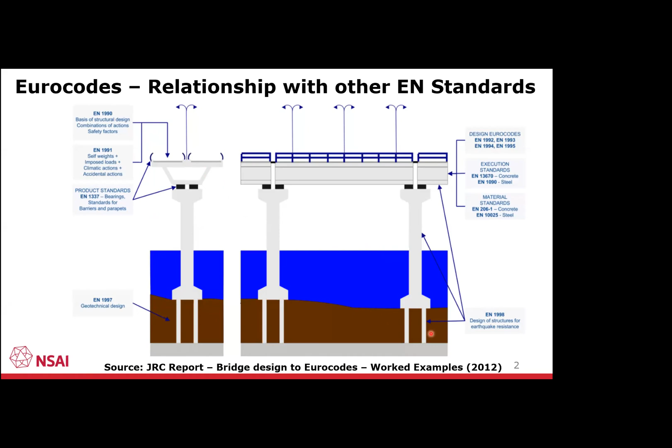So firstly, we have the basis of design, which is EN 1990, which is used in conjunction with EN 1991, Eurocode 1, actions on structures, but also geotechnical design, Eurocode 7, and Eurocode 8 on seismic or earthquake design and resistance. Now, these are used to ensure that the structure's reliability and robustness are suitable for a given design life of a structure. And for bridges in Ireland anyway, that is approximately 120 years.

Now, there's also the material detailing and design Eurocodes, of which 4 have specific bridge parts. That's Eurocode 2 for concrete, Eurocode 3 for steel, Eurocode 4 for composite materials, and Eurocode 5 for timber. We also have Eurocode 6 for masonry structures and Eurocode 9 for aluminium.

And then the second generation codes, we will have 2 new Eurocode parts, or Eurocodes in their own right actually, on structural glass and tensile membrane structures as well. We'll talk a bit more about that later on.

But with all of these Eurocodes, as I said, they are used together, but also in conjunction with other construction product standards and construction standards in general, such as execution standards like EN 1090 Part 1 and 2 for steel welding, which you might be aware of. Also for material specifications like EN 206 for concrete, as well as other construction products and harmonized standards.

And at this point, I'd like to point out that I suppose the Eurocodes aren't just design standards in their own right. They do support the European internal market by removing barriers to trade, particularly in the area of engineering services. And they support the Construction Products Regulation and the Public Procurement Directive as well.

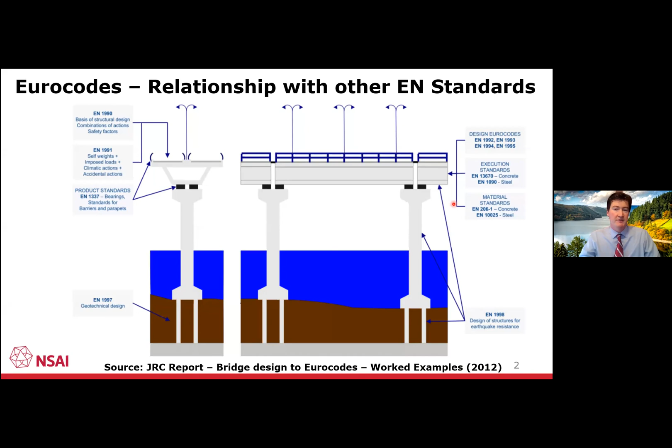So to understand how all this came about, we should really look at the history of the Eurocodes. They were first envisaged by the Commission back in 1975 to support the Treaty of Rome. Then in 1984, the Commission themselves actually issued a set of Eurocodes. Then with the Construction Products Directive, which came into force in 1989, responsibility for the Eurocodes was handed over to CEN, the European Standardization Organization. And over the next 20 years or so, they were developed further. And in 2010, we adopted them fully here in Ireland ourselves.

So moving on then to some more present day. About 5-6 years ago, work started on the development of what's known as the second generation Eurocodes, and I suppose the purpose of this event. And now, this year, we are looking at the launch of very technically stable drafts and documents which are being issued for public comment and consultation across Europe. And again, I'll talk a bit more about that later on.

But finally, just to state that while the date in Ireland for the adoption of the second generation Eurocodes still hasn't been formally determined, it does have to be done very soon. And the decision will be made in conjunction with all relevant stakeholders, and this would include government agencies and departments and construction sector representatives.

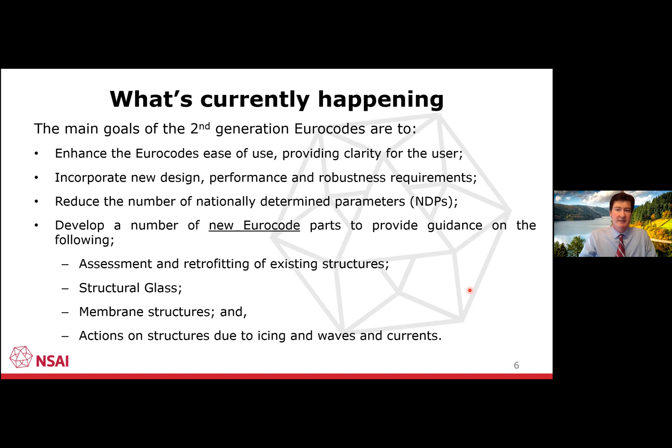The project will see 74 Eurocode documents being published. The vast majority of these will be EN standards, and a number of technical specifications as well. Of those 74 documents, it's estimated that 55 parts will require Irish national annexes. This has yet to be finalized, but it will exclude Eurocode 8 for seismic design for, I would guess, obvious enough reasons. There are 9 brand new Eurocode parts going to be published, and we've already touched on some of those.

And 3 of the Eurocodes are undergoing major restructure, in particular EN 1990, which is going to give more prominence to geotechnical design, but also give additional guidance on structures other than buildings and bridges. Eurocode 2 for concrete is looking at introducing new performance-based criteria known as exposure resistance classes for durability and depth of cover. And Eurocode 5 for timber is looking at introducing additional guidance on cross-laminated timber, CLT, particularly for use in high-rise buildings made from timber.

So Jim is going to go into more detail on the technical changes to expect later. But in any respect, this is a significant body of work that's going to have a big impact at national level, as a full revision of our national annexes and the NCCI documents we have is going to be needed. Now, while the NSAI is responsible for the publication of our national documents like the national annexes, it's a group of practitioners like yourselves that are critical to this revision. And the group, as has been mentioned, is involved in the National Technical Committee TC15.

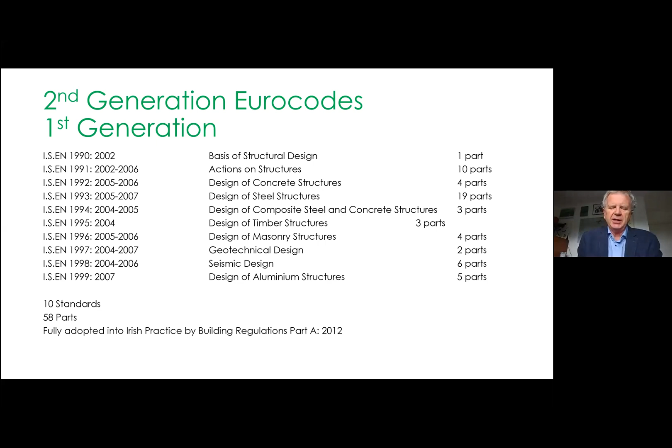They were all generally adopted into Irish practice by the building regulations, Part A in 2012, and other bodies such as TII, or the NRA as it was at the time, brought them into play at that stage. So these are now the documents which we are using here in Ireland, and most people will be familiar with these first generation Eurocodes. But as you can see, the first of these documents are nearly 20 years old. So it's a slow process changing them, and the process is ongoing, and we're now moving on into the second generation.

So there are links between the Eurocodes, and Eurocode EN 1990 was called Basis of Design. As I explain later, the title is even changing. It was followed by EN 1991, which was a material independent code on actions on structures, and that was divided into a number of parts, and I'll mention some of them later in this talk. There were 6 material codes dealing with design and detailing: 1992 concrete, 1993 steel, 1994 composite steel and concrete, 1995 timber, 1996 masonry, and 1999 aluminium, followed by 2 additional material independent codes, which were 1997 geotechnical design and 1998 seismic design.

All parts of the codes are going to be updated with new layouts, new clauses, new content, and each of them will require a revised national annex in time to be prepared, setting out what the Irish approach to the NDPs, etc. is. Now, I've highlighted in red a couple of new parts, and I'll be mentioning these in a little bit more detail later. EN 1990 is going to have a second part, 1990 Part 2, which is assessment of existing structures, assessing not only buildings but bridges and so on. So it will be a very important document and needs to be looked at.

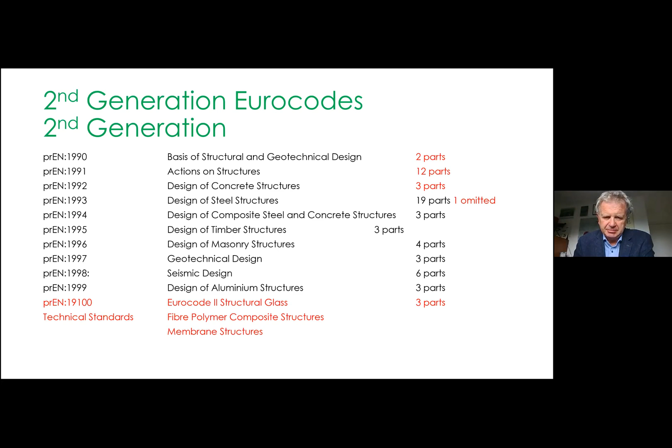But as I say, every document will be substantially changed from what has been there before. The documents are all new documents and will need to be treated completely so. So EN 1990, the title of this, as I said earlier, has changed. It had been the basis of design, but it has now become the basis of structural and geotechnical design. It has incorporated an awful lot of geotechnical information across from EN 1997. So this is important for us all. It has made quite a change to this document, which has become more complex and needs to be considered very carefully from the point of view of every country, including Ireland.

There will be annexes for different types of structures. In the current version, there was an annex for buildings and there was some information for bridges, but this is going to be added with further information in 4 more annexes: towers and masts, silos and tanks, cranes, and waves and currents. And these will be the basis of design for those, and we'll have a lot of technical information in relation to how load factors are combined and other issues. There will be 2 new annexes. One will be a basis of design for bearings, and the second one will be vibrations and footbridges.

And finally, there will be another part, which was EN 1990 Part 2, which will be assessment and retrofitting of existing structures. So again, you can see there that the development of EN 1990 has a very substantial amount of information, and some of it will be quite technical for people designing structures such as coastal structures under the waves and currents bit, and some of it will be fairly general for those of us designing buildings and so on.

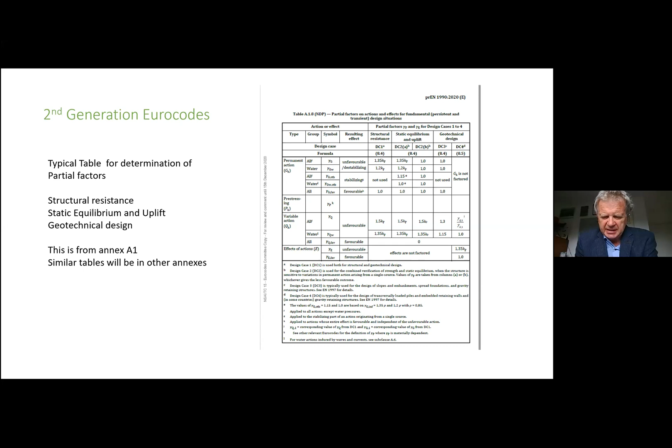One area where the Eurocode is spending quite a lot of effort is in bringing in the robustness rules. A technical report has been prepared, providing the basis of modification of the existing rules. Some of them are in EN 1990, the basis of structural and geotechnical design now, and some in EN 1991, particularly Part 1-7, accidental actions. But new and modified clauses have been prepared for insertion into the material Eurocodes, and Professor Alan O'Connor of Trinity is the convener of this group, and he's been involved very much in the development of these clauses.

There are horizontal groups Europe-wide for fire and for bridges. Ken did mention an Irish horizontal group for bridges, but the structure of the codes is such that the general part is Part 1-1, the fire part is Part 1-2, and the bridge part is Part 2 of each code. And then if there are actions across them, these will be carried across and dealt with within these horizontal groups.

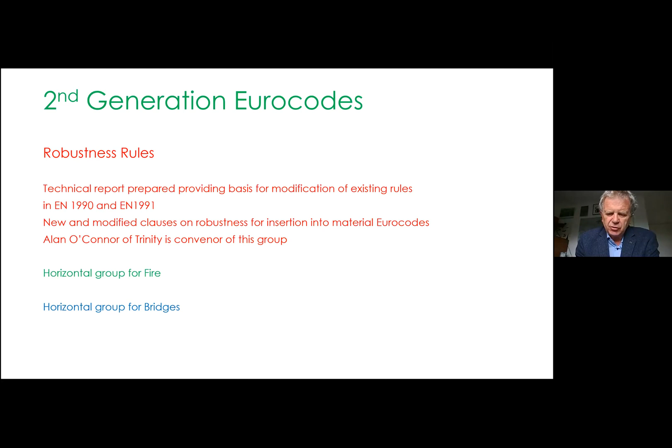There's a potential EN 1990 Part 2, the assessment and retrofitting of existing structures. And a current version of this has been published by NSAI, which is SR CEN technical specification 17440/2020. And the scope of that is additional or amended provisions to EN 1990, how to assess existing structures, the modification of retained parts of existing structures, the assessment of structures, whether it's based on calculations or based on past

performance of the structure. So there's a lot of information in that, and that is a document which will have to be looked at in detail from an Irish point of view, both in respect of changes to bridges and changes to buildings and indeed all other structures. So within that, this is a table from that, just for an example.

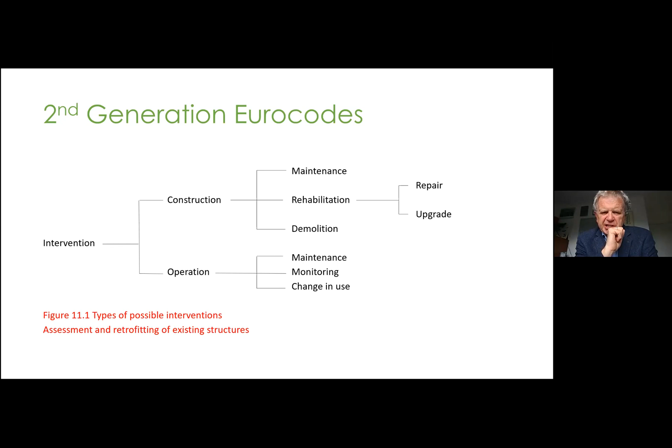It talks about the intervention into an existing structure, and the intervention can either be a construction element or it can be an operational element. Construction can be maintenance, rehabilitation, or demolition. Operation is maintenance, monitoring, change of use. So there's a lot of issues which would have to be looked at, and this gives an importance to the role of us as structural engineers in the development of buildings and of our existing building and structural stock going forward.

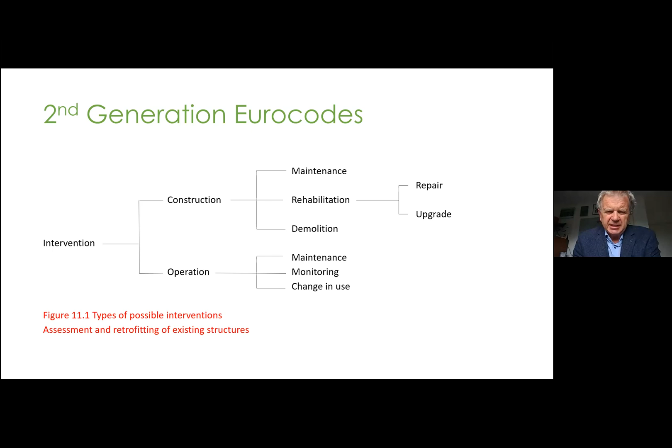The second generation Eurocodes, EN 1991, the various parts that are in that at the moment. There are 10 parts at the moment. There are going to be 12 parts. The existing parts are being modified to some extent. There's no huge variation or extension to the scope, though, as I said earlier, accidental actions and robustness is one that will have a fair amount of development in it in due course. There are changes in these that have to be brought into account, and new national annexes will be required for each of these parts.

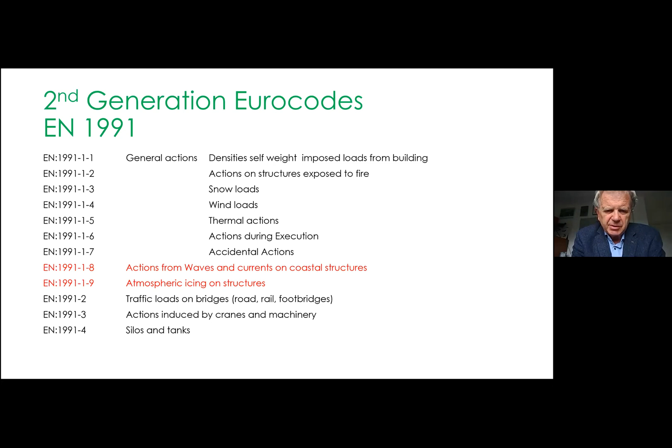The two new parts are actions from waves and currents on coastal structures and atmospheric icing on structures. There's a detailed part, as bridge engineers will be familiar with, which deals with bridges, and these are subdivided into road bridges, rail bridges, and footbridges, and sections on cranes and machinery and silos and tanks.

This new generation, the Part 8 on waves and currents, is a very detailed document, about 228 pages, and it deals with hydrodynamic conditions. It looks at different types of structures, breakwaters, embankments. They're generally coastal structures and how they're affected. And a basis of design has to be developed for that, which will go into EN 1990, and that work is ongoing at the moment.

The other new part is 1991 Part 1-9, atmospheric icing. It's a smaller document. It looks at the ice loading on structures, and generally, I suppose, in the Irish context, the main reference is things on cables for the ESB and so on. The ESBI have produced a map which is available and which will probably be used within our national annex when that comes. But again, it's looking at what is the effect of ice loading itself on a structure.

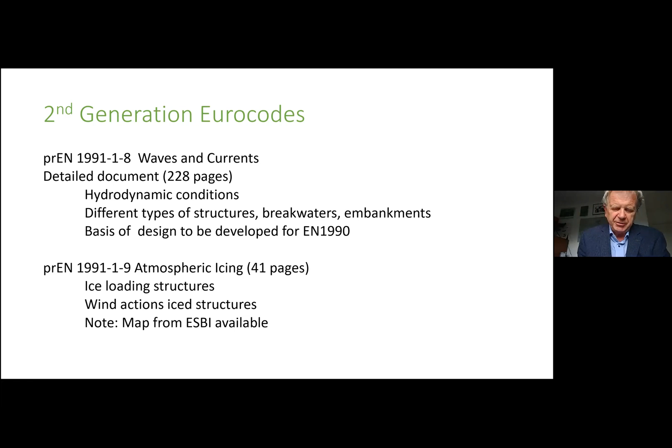So if ice accretes onto a cable or onto a mast, what happens to it, and also then the wind action on an iced structure, because the area of the structure may increase from a small diameter cable to a much larger piece of ice with a much more substantial loading. So there are important issues to be dealt with there. Possibly not the most urgent from the point of view of normal Irish designers, but something that has to be looked at.

And just very briefly touch on some of the other Eurocodes. I'm not going to go into any detail because there just isn't the time. Design of concrete structures, Part 1. Now, Ken has already mentioned that there will be a new section on durability of concrete. And this will have to be reviewed not only by our committee on the Eurocodes, but in conjunction with the Concrete Consultative Committee, who deal with EN 206 Part 1. So this is very important, as you know, the exposure classes, the exposure resistant classes will have to come in.

Another topic which has come in here is that it is likely that bridges and liquid retaining structures will be put in this part. There were 2 parts of the Eurocodes dealing with those beforehand, but I think it's felt better that these would be brought in and the clauses would be in there. But there's a lot of other new rules coming in, different reinforcement strengths of concrete, using stainless steel reinforcement, various rules for punching shear, lap lengths, etc. So there's a lot of information that will need to be looked at in detail with the group looking at those.

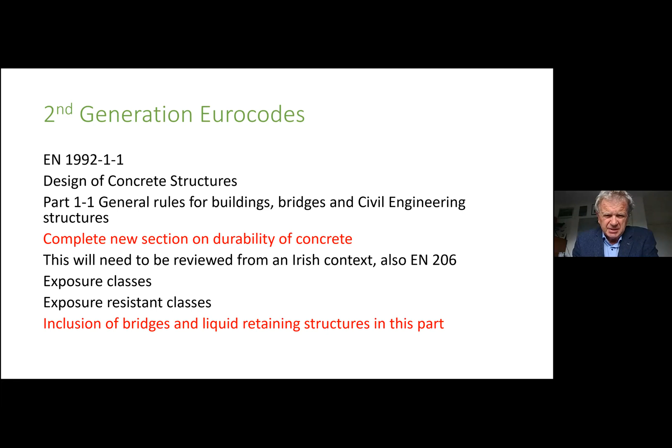I'm not going through most of the others, but steel, there's changes with different classes of steel. Timber, as Ken mentioned, they've brought in cross-laminated timber and different types of analysis. Masonry, new rules have been brought in.

Then in Eurocode 7, there's been a restructuring of that document, and some of the information has gone into EN 1990, and specific requirements. There's a new part, part 3, geotechnical structures. There's more information in there, so that again needs more detailed looking at.

I've mentioned here glass structures. So there are 3 technical standards. One is the basis of design. One is the design of out-of-plane loaded glass components, and the third is the design of in-plane loaded glass components. These are now developed and published. Work has also taken place in the production of technical standards on fiber polymer composite structures and membrane structures.

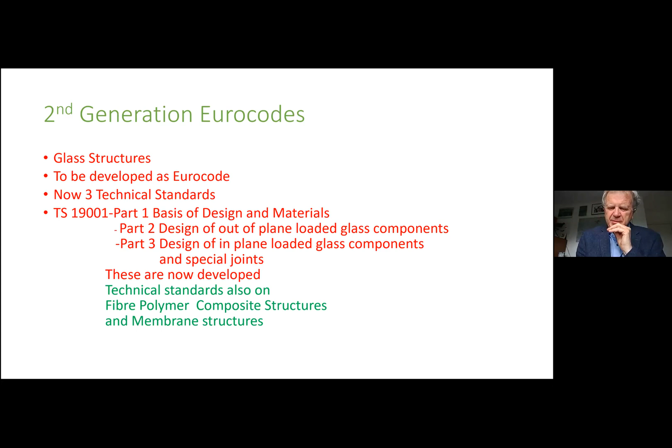So the issues which are arising, there's the program of this, there's development of this. As Ken said, this is in hand since last year with the production of various parts, and this will go on for a couple of years. And there's a huge amount of work. I think here in Ireland, we need to determine the priorities that we're looking at. What are the critical issues that we need to look at? So the work of our committee is partly a prioritization of parts of the Eurocode, but we do have to look at all the parts.

There are climate issues to be looked at. A number of the codes, wind, snow, thermal actions, and atmospheric icing deal with climate issues. We are liaising with Met Éireann and the Department of Environment in relation to that, and a group has been set up looking at those issues, but also looking at other issues, some to do with rainfall, some to do with temperature, and so on. So our group is moving into that area, and as Ken said, we do need assistance. There's a lot of work to be done, and we need people to do so.

So the current structure, Ken has gone through this. We've the National Eurocodes Consultative Committee here in Ireland. We've mirror groups for most parts. Part of our role is the development of national annexes, but there are gaps in our knowledge or our cover. For example, fire and glass, the existing structures, new parts within the code.